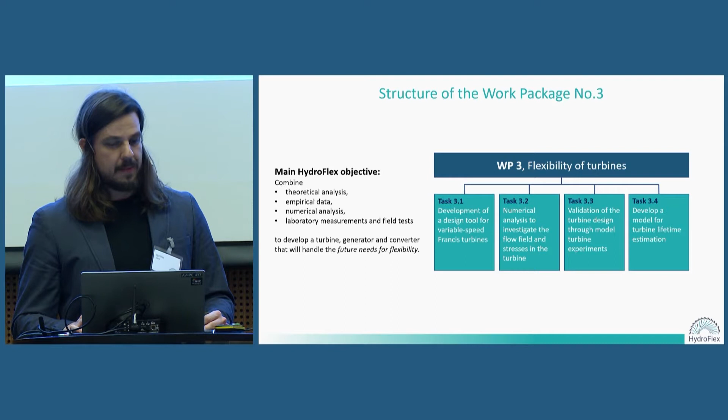So in this work package, which is named the flexibility of turbines, how do we address the main objective of HydroFlex? The main objective, as you can see on the left side, is to combine pretty much all research means, that's theoretical analysis, empirical, numerical analysis, laboratory measurements, in order to develop turbine, generator, and converter, as Ole Gunnar mentioned previously, that can handle the future needs of flexibility.

And in our work package, we work on the turbine in particular, and we have 4 tasks. The first task is to develop design tools that can help us do the research and build such turbines. The second was to combine the design tool with numerical analysis. The third task was to validate through experiments. And finally we had another task dealing with the lifetime estimation of the turbine.

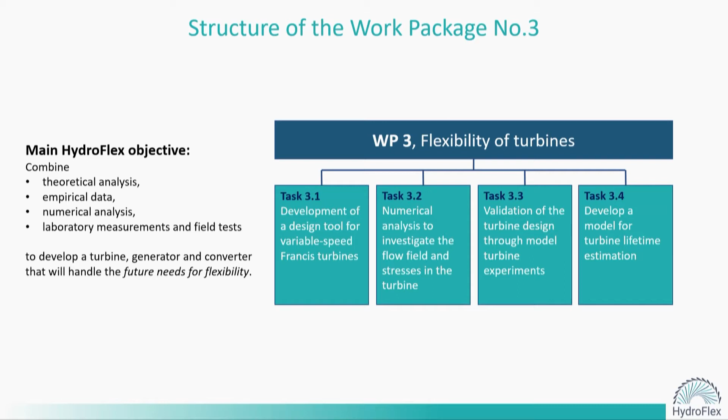We had 5 partners working in this work package, 3 universities and 2 industrial partners. NTNU was the leader of the work package, and we had LTU, Luleå University from Sweden, the St. Cyril and Methodius University from Skopje, and we had also Rainpower, the turbine producer from Norway, and EDR and Medeso, a software company dealing with development of numerical tools and software.

I was working at NTNU, but I recently moved on to Sintef, so that is why we see Sintef here as well. Sintef was also a partner in this project, and most activities were focused on different work packages. Not this one as well.

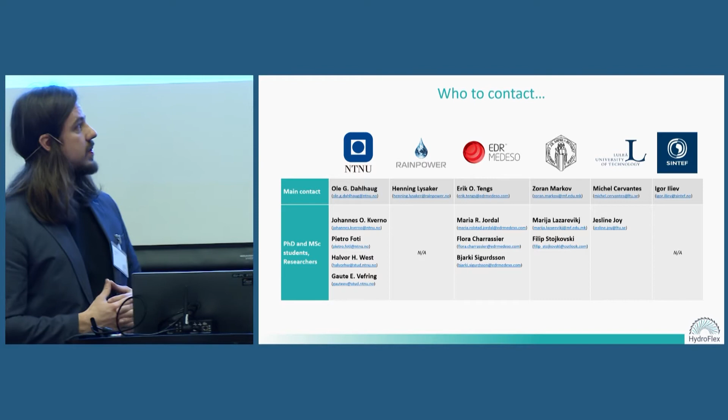So I'll try to summarize what was done in this work package, and as you can see, many people were involved. I list here the contact of these people, and for each slide you'll see the logos in the upper right corner. So if you have further questions later, feel free to contact any one of these people who may give you more details about what was done.

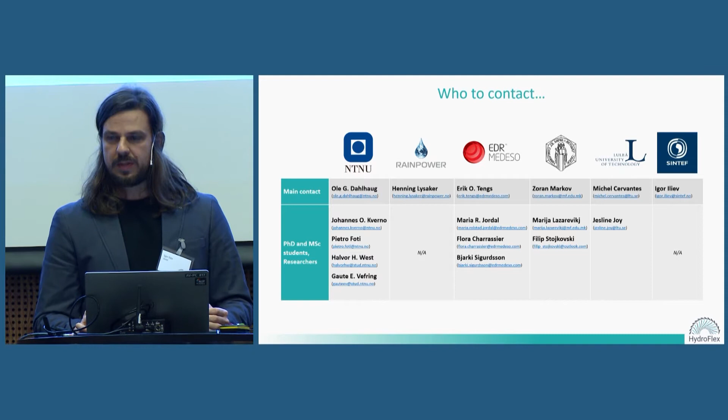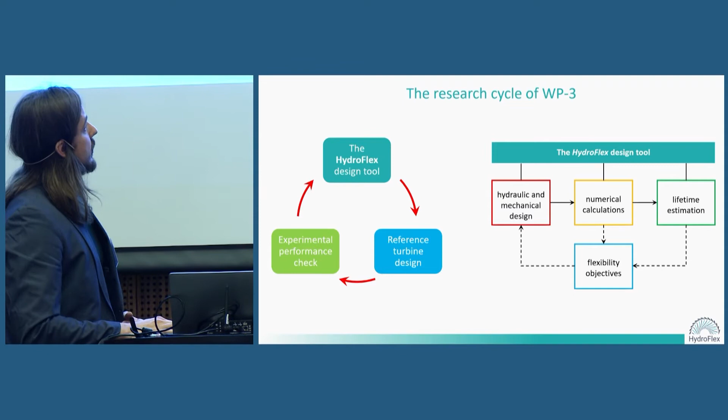And the HydroFlex design tool has sub-parts in it. We have a part that handles the hydraulic and mechanical design. We have a part that performs all the necessary numerical simulations. And all this can be shared to the lifetime estimation tool as well. And everything is returned back to check how our flexibility objectives are met.

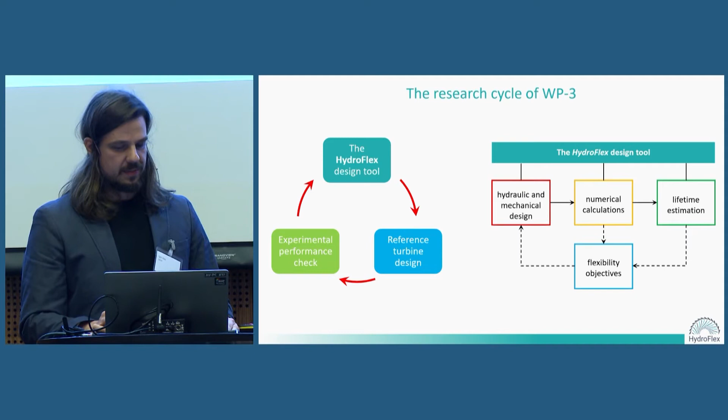Let's say that in this work package we define flexibility as increased or flattened out efficiency throughout the entire operating range, as much as possible, of course, and reduced stresses, both static and dynamic stresses. Of course, these objectives can be redefined for different design scenarios, and everything is fed back all the way to the beginning. So that is how the tool works.

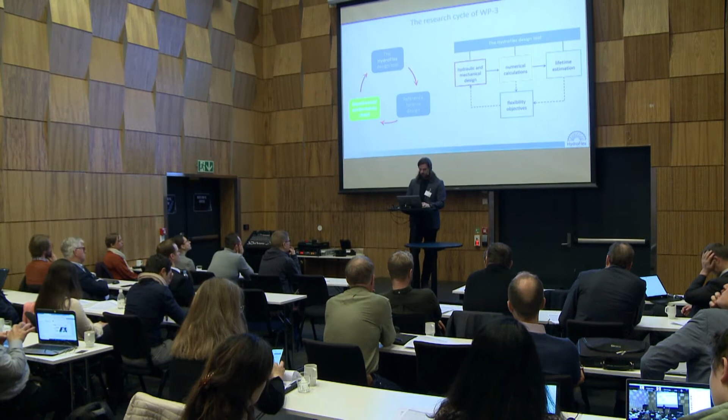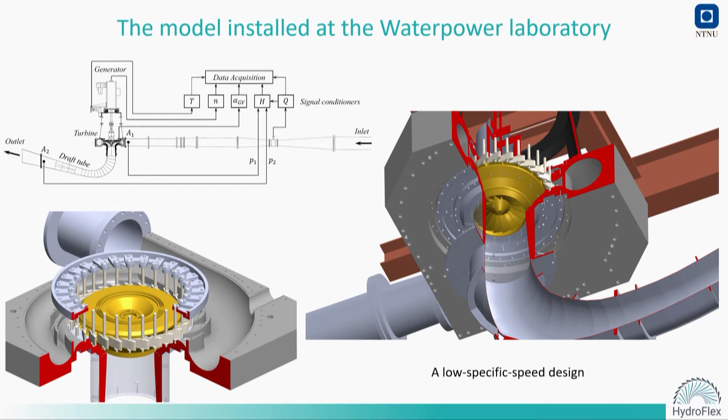Most of the experiments in our work package are done in this lab, except for the material tests, which I'll mention a little bit later, which were done in different NTNU and Sintef labs.

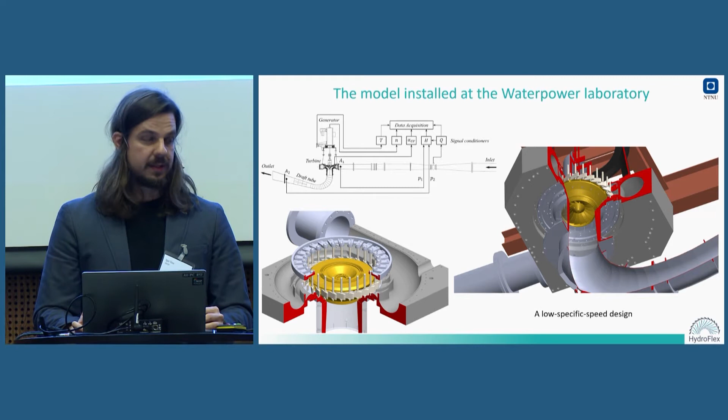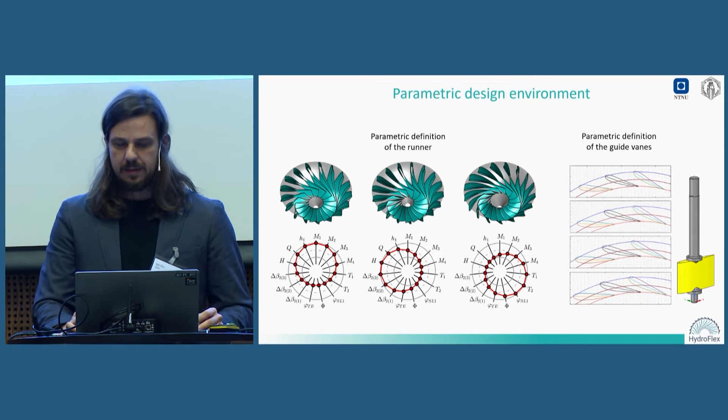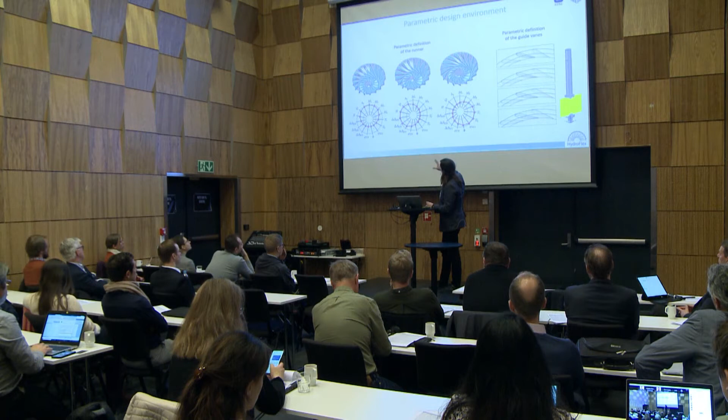Yes, so it's a turbine model, turbine rig that can achieve IEC standard quality. In the parametric design environment, we have spent some time to define the geometry of the runner parametrically. As you can see, it is defined on these diagrams. We see different combinations of the 15 parameters that were used to define the runner, and they have different values here, so you can see how each parameter is affecting the geometry.

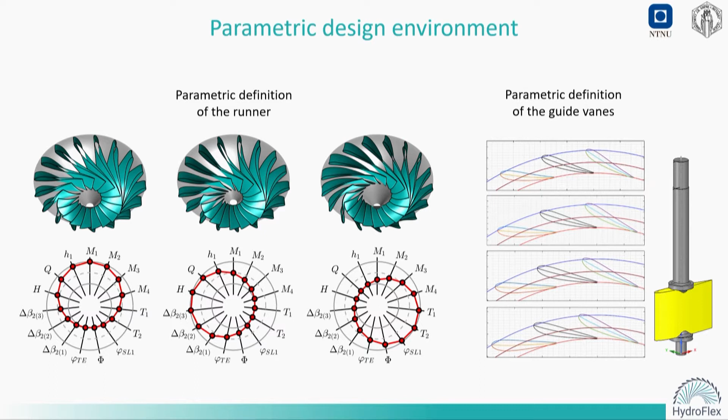On the other side, on the right side, we have the guide vane parameterized. We have just 4 randomly generated guide vane designs. You can see that, for instance, the thickness of the guide vane changes, the length of the guide vane changes, and other parameters as well, which were used in the design tool. Of course, I cannot speak more about the details here, but you can find all the information you need in the relevant publications.

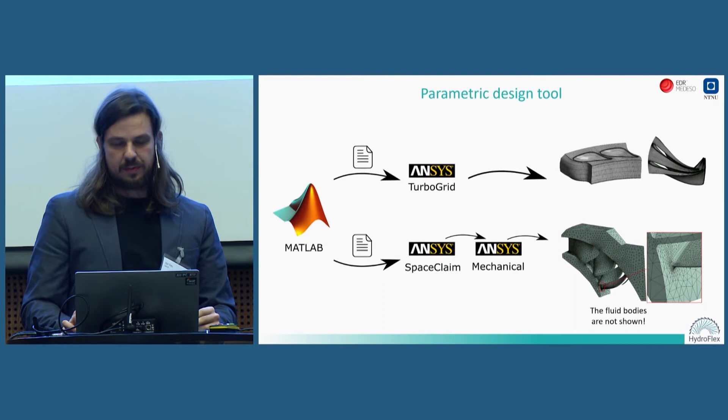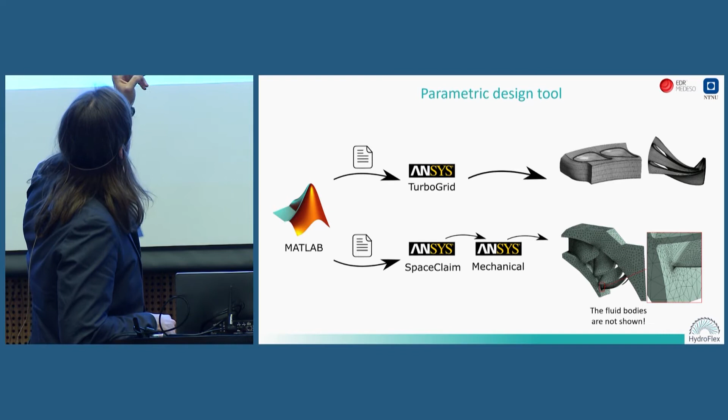So these were, by the way, MATLAB codes, and we used this scripting method to create output files that can go straight into our numerical simulation tool provided by the commercial software ANSYS. Once the files go in the ANSYS software, for instance, here in this tab we create the meshes. In the upper part, we use TurboGrid, and we import curve files to create the hydraulic domain, and then the mesh is exported. Here shown the guide vane and the runner.

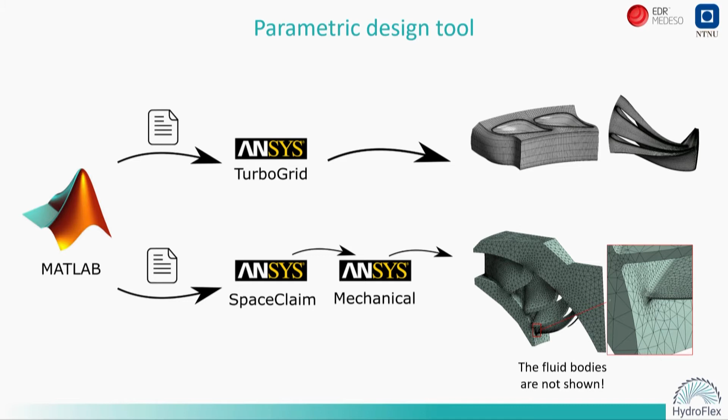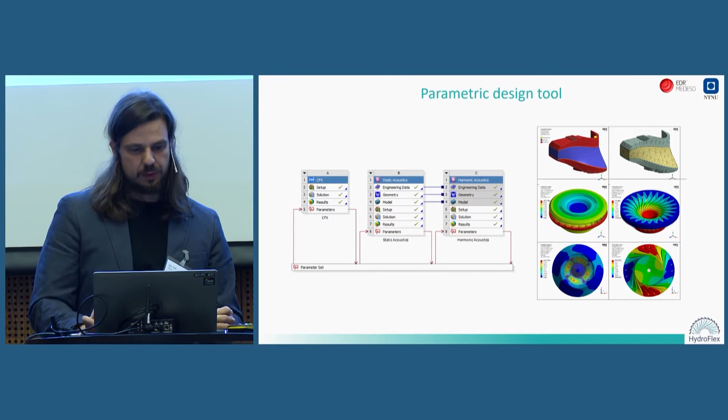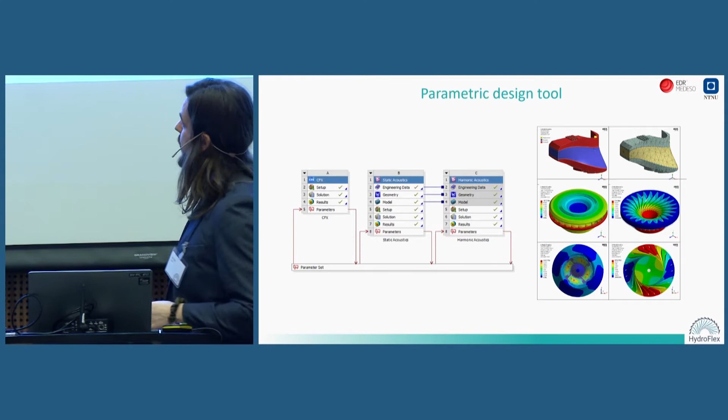On the lower part, we have some operations done in SpaceClaim to finish the geometry and identify a sector. And then finally the meshing. As you can see here, the fluid bodies are not shown, but they are also included. So the runner is simulated submerged in water. These meshes then go further on into the simulation part. This is a print screen presented directly from the Workbench project.

On the left side, the first part is the fluid simulations. These are actually transient simulations. And then we have 2 more, static acoustic and harmonic acoustic simulations. So the first one performs the transient simulation, then the oscillating fluid pressure, that's the important part, is loaded onto the structure, previously decomposed using Fourier series decomposition into the frequency domain. And finally, the structural analyses are performed in the frequency domain, harmonic analysis.

So what we can see there, the mesh that is shown is not the actual mesh that is used. That's just for demonstrational purposes and initial tests. But we have here the total deformation on the left and the imposed pressure field on the right, for 2 nodal diameters. So this is the transient.

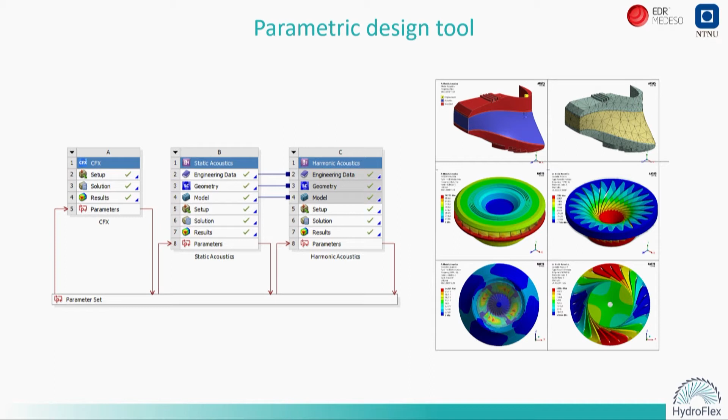So as I said, using these tools, we had to design reference geometries to conduct our laboratory measurements. For the geometry of the HydroFlex runner, at the time, the part of the tool dealing with automatic optimization from the structural side was not ready. So we used only the hydraulic optimization part to optimize the geometry. And then later we performed structural checks just to make sure that everything works well when we put it in the lab. So what I show here is just some CFD results.

The original turbine that we're using, the Francis 99, has its own runner, but we have designed a replacement geometry because we wanted a reference geometry that comes directly from our tool so that we can directly verify all the numerical methods. And as you can see, CFD results are quite interesting and pretty capable to capture the trend. We see that the turbine has the highest efficiency at one operating point, and then as it goes back and forth, the efficiency reduces. For that operating point, why is that? That is because the flow field is not well aligned inside the turbine passages, where we have additional losses. And that is the wetted surface of the HydroFlex runner.

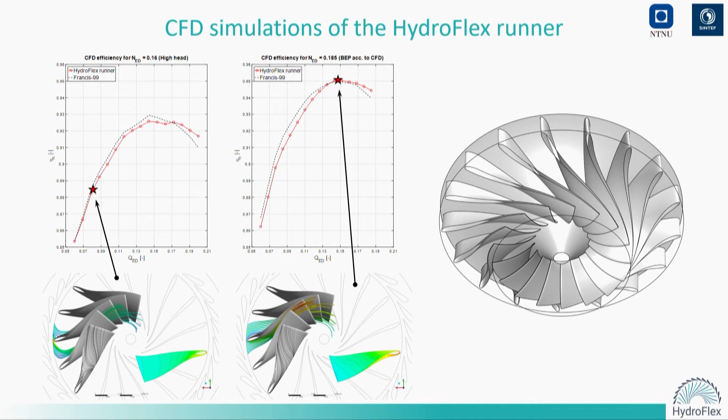As I said, we used structural simulations first to check the structural integrity, and then we used the maximum static principal stresses and strains to identify two locations on the trailing edge where we would like to do strain gauge measurements. Why is this important? Because when we operate the turbine at off-design operating conditions, it will be subjected to transient loads. And at the trailing edge, we have maximum stress locations. That's where typically we have cracks on the turbines, which is something that we want to avoid if we want to design flexible turbines.

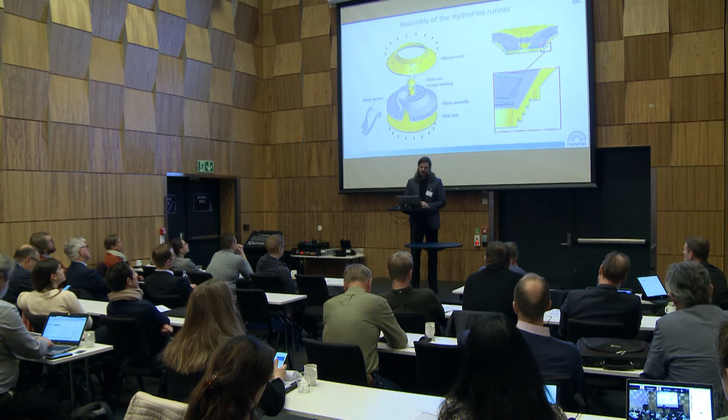And this is how we designed the structural or the mechanical assembly of the HydroFlex runner. We try to reuse the hub and shroud that were already available in the lab from previous research. And then what we did is we just redesigned the blade. So this assembly is a modular one, so if we later come up with an even better or different design, we can always test it just by replacing the blade sections.

Another important feature was that with this design, we know exactly where the connection is. And that's very important for when we do the structural simulation validation. So with this runner, we have solved some of the drawbacks of the original Francis 99 runner that were identified in previous projects.

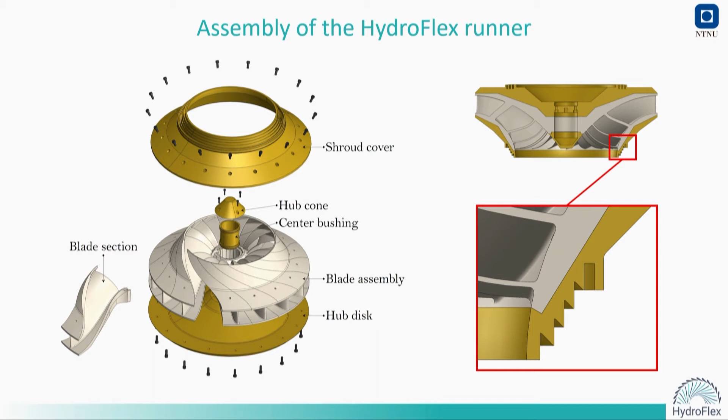And finally, we wanted to have the center bushing and the cone. That's the part where we will put onboard instrumentation. Because as you can see, this runner is rotating, and we want to perform measurements in the rotating frame of reference while it's rotating. So we need some equipment to be installed in the runner in a watertight place. Electronics, for instance, that should survive the operation of the runner.

So as I mentioned, in the central part, this is how, for instance, the amplifiers will be stacked inside. So we use 3D printed parts. We have a PhD student that is working on this to stack the local amplification. And on this diagram, you see, we plan to install strain gauges and pressure sensors. The signal will be fed into local amplification for improving the signal-to-noise ratio.

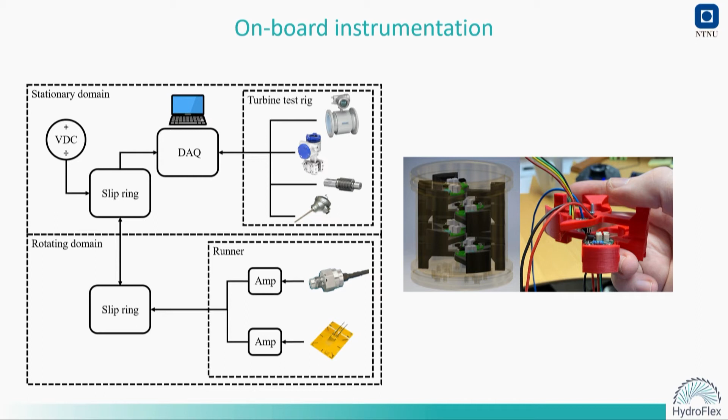Then that goes to slip rings, so that's the rotating domain, and in the stationary domain, it is transferred once again through the slip rings, and finally into the data acquisition module. Of course, together with the rest of the turbine performance, which is that part, the turbine test rig.

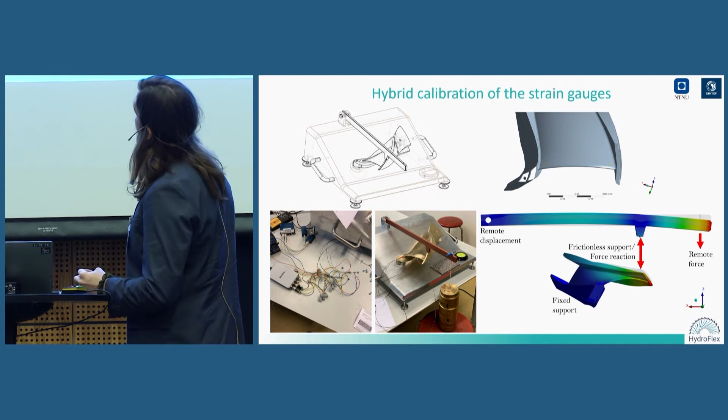For the strain gauges, because we finally want to know what the stresses are, but we can only sense the strains, which is the elongation of the material, relative movement, we came up with a hybrid calibration setup. So what we have here is, what should I call it? A fixture for the blade with a pivoted arm where we can install weights. You can see the strain gauges, they're connected to the amplifiers.

And then we can load the structure, see what voltages we get, and then we replicate the entire setup numerically and find out what the strains are in those locations. So that is how we intend to perform the calibration.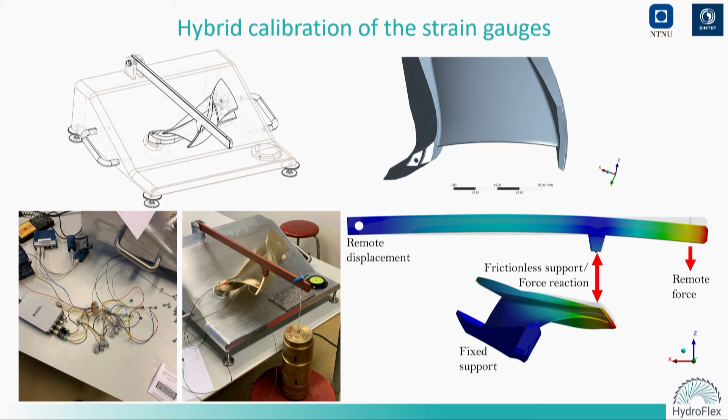By the way, there is no good way to calibrate strain gauges mounted on complex structures. If it's a simple beam, maybe we can use an analytical solution, but with this double curvature blade, it's very complex. So the only option was to rely on numerical simulations, very accurate numerical simulations.

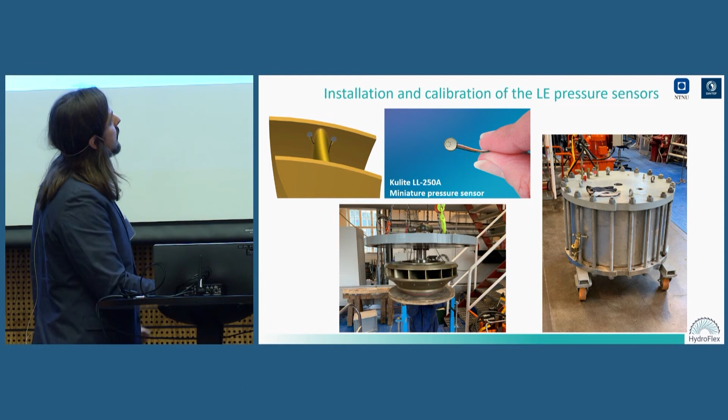We also, as I said, have installed pressure sensors at the leading edge, and this is how we plan to calibrate them. The entire runner will be submerged in that tank and pressurized. And then through that shaft, we have all the wires coming out and connected to a PC where we collect and record the signal.

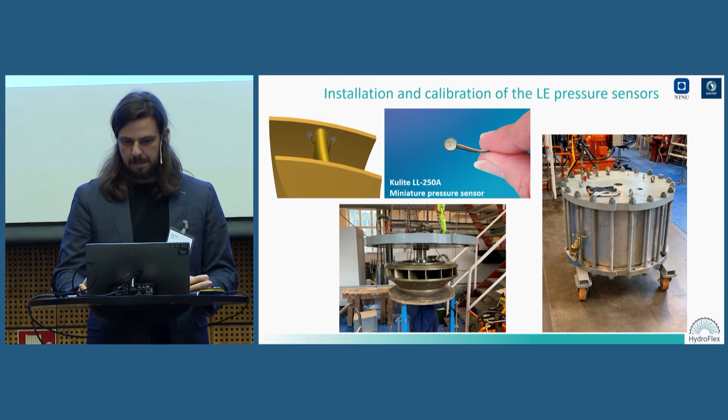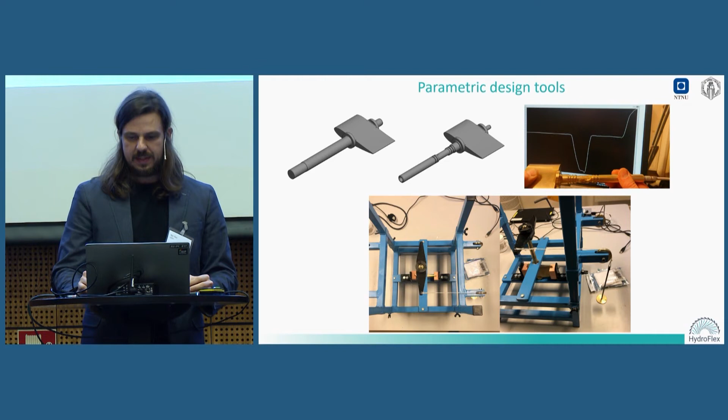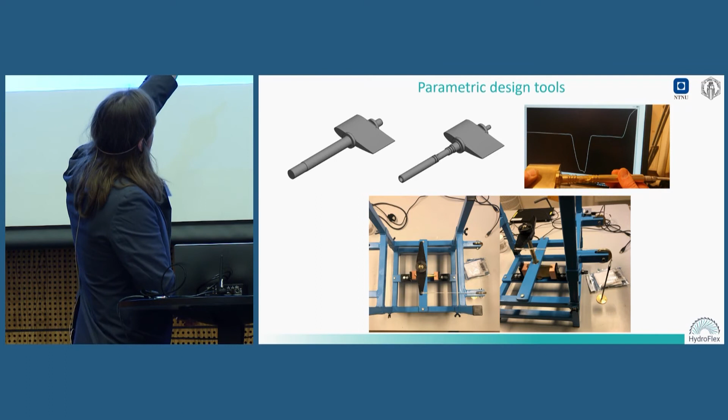For the guide vanes that were designed, the reference geometry of the guide vane, we have the standard torque measurement, and here I give some pictures of how that setup is supposed to look. So the blade is fixed in that jig, and then we apply torque. Here I only show one part, but actually on the other side we need to have another pulley, another weight, so that we apply only pure torque.

On the top part of the figure, on the left we have the regular guide vanes, which are used in efficiency measurements, but on the right we have a special type of shaft where we have mounted a strain gauge, which is calibrated here and is used to measure the torque during operation, the static and the fluctuating torque due to the RSI.

Those of you who will join us today in the lab tour will have the opportunity to see these devices demonstrated there.

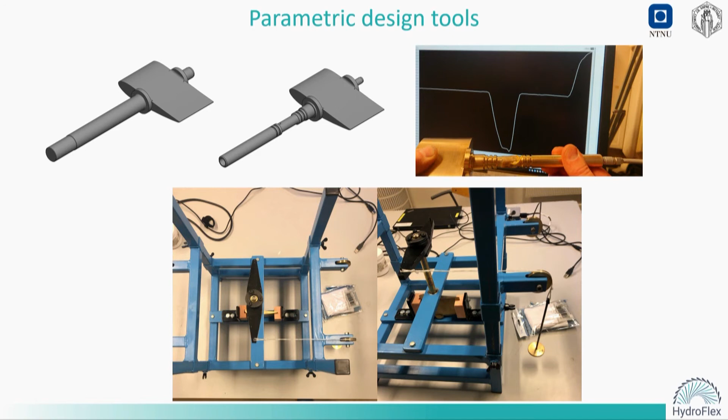We had another research part which was not parameterized at this stage, but it's a research that tried to control the residual swirl at the outlet of the turbine runner. So when the turbine is operating, especially at off-design operating conditions, the flow will have a residual swirl at the outlet of the runner in the draft tube cone. So this research was done in order to try and control that residual flow or reduce it. And by doing so, for instance, in part load, try to even mitigate the pressure pulsations as well.

By doing this, of course, the researchers have tried to increase the efficiency and reduce the pressure pulsations, which should translate in increased flexibility of the turbine. The results are very promising. The way those guide vanes are installed in the draft tube cone, they can move. So for several positions, measurements were done in the lab, and the performance was checked, and pressure pulsations as well. So they installed pressure sensors in this draft tube cone, and the pressure pulsation levels were recorded.

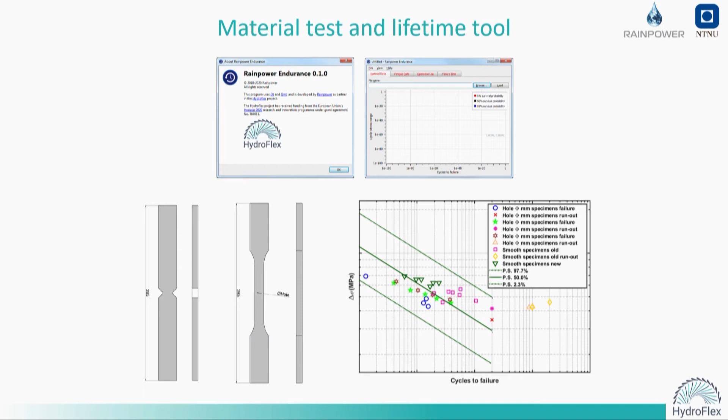Finally, all the data is collected and gathered in one tool. On top, we see some print screens of that tool, where statistical analyses are further being performed to identify what would be the remaining lifetime of a turbine. Of course, what's important as an input is the stress fluctuations for different operating conditions. So using stress fluctuations with, for instance, rainflow counting and Miner's rule, one can translate from an S-N curve to a partial lifetime of the turbine. This can use data from the numerics or from experiments for a particular runner.

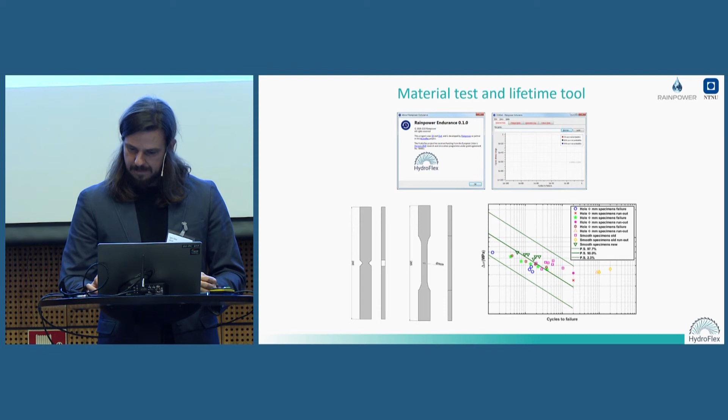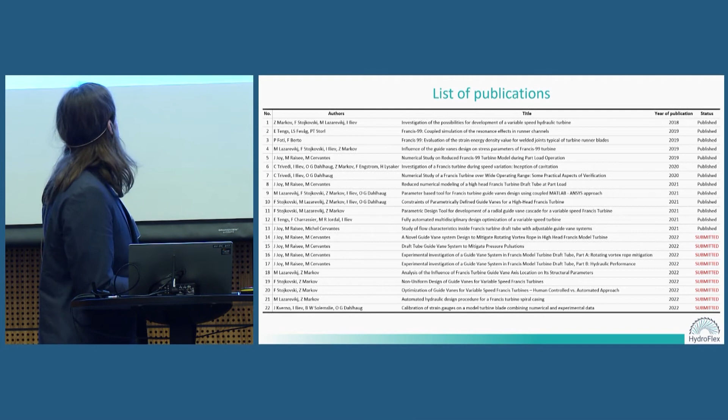As I said, most of the details are included in some of the publications that we have. Some of this is already published. We have several submitted, but more will come because as we collect more data, the writing part will kick in. So stay tuned, those of you who are interested in different parts.

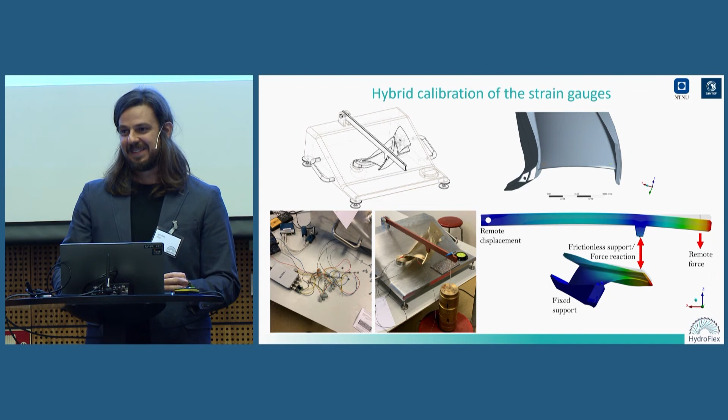Hi, Eric from Statkraft. I thought the draft tube vanes were interesting. How about at best efficiency point? Did they bother the flow at all? Were they invisible? That's the one question. And also, this is very much in the spirit of the Horizon 2020 sister project, AFC4Hydro. I don't really know, but did the projects help each other? Did you collaborate on tasks, or were there shared results that are of interest to both? That was number 2.

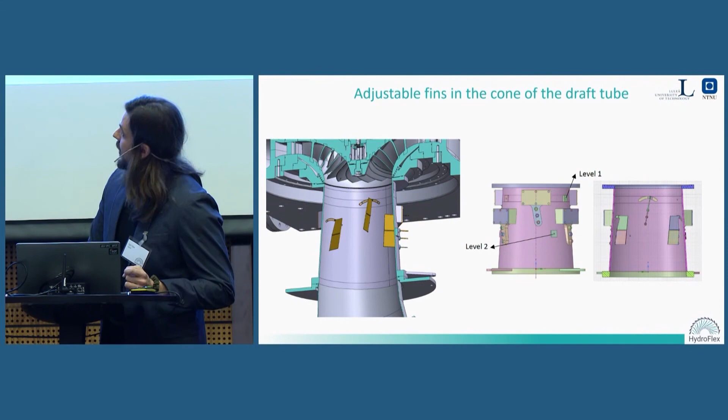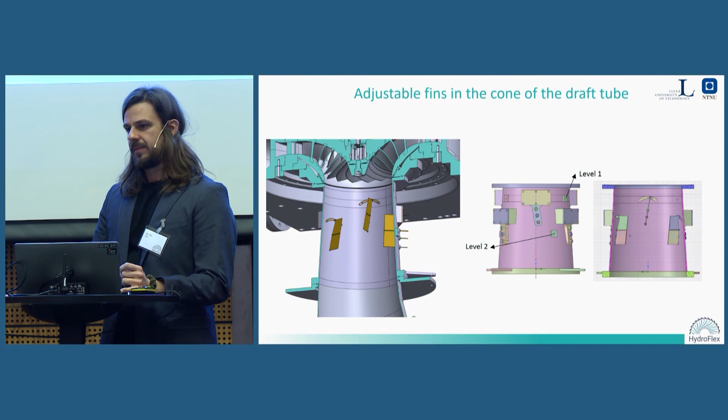Thank you very much. The first one, these movable fins or guide vanes in the draft tube cone were designed to have minimum impact at the best efficiency point. They were positioned to follow the flow stream in this operating condition, and they were envisioned to change in angle. For now, it's just the first part, but they can perhaps be designed to tilt the entire body of the fin. I don't think we saw significant impact at the best efficiency point from them.

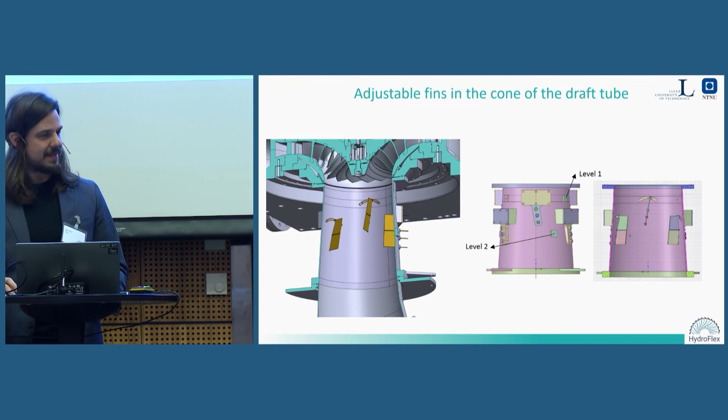And the second question, no, we did not collaborate in these tasks. LTU is partner in both projects, so yes, they have access to results from this project as well. I don't remember direct discussions or collaborations at that time, but of course they can communicate both projects and exchange data. Everything will be open, by the way. So not only that project, but any other project can start from there and build on it or use the data.

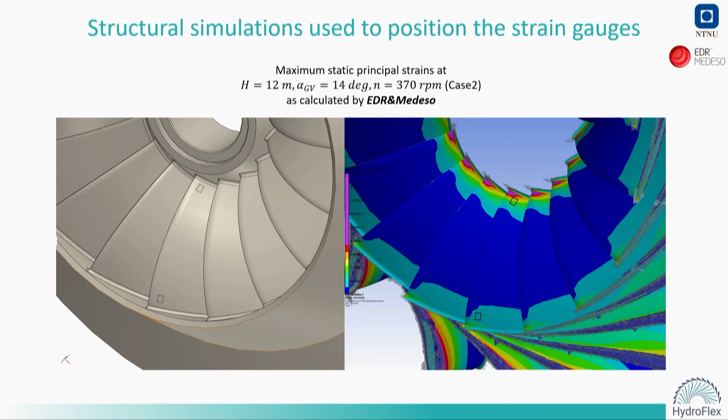I have one question. Can you go to the position of these strain gauges? At least at the hub there, you have placed them in an area where you have large gradients of the strain. Do you think that will give you an uncertainty? When you do it manually, you know that the position will be a little bit off, maybe. What's your comment on uncertainty for this?

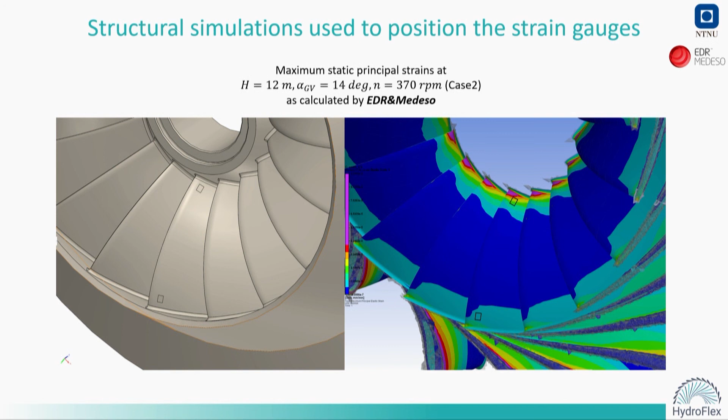Yes, they will be manually installed on the blade, and our lab technicians have tried their best to position them where we want them. And obviously, when they're placed in the gradient of the strain field, a small position change will introduce uncertainty. So we tried our best to install them where we want them and later measure where they're exactly installed and then reflect that in the numerical part.

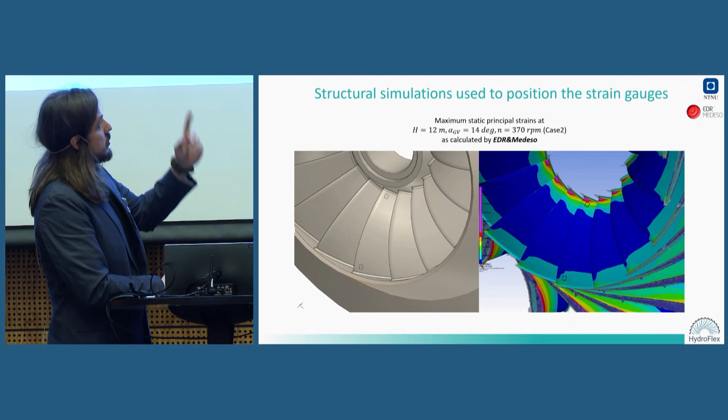Ideally, we would want to install the gauge where the maximum is, but that is where we have a curvature due to the fillets, and in that area we cannot mount them the way we want. So a compromise has been made to install them in another remote place and then use results to sense what is happening at the maximum. So some uncertainties, of course, with experimental methods must be accepted.

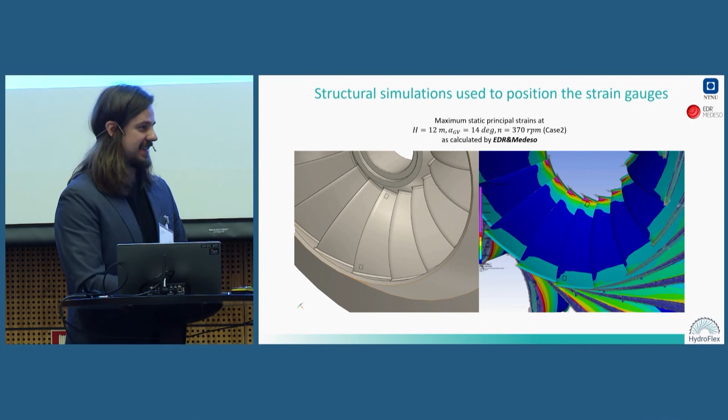Any other questions? Have you tested these strain gauges already, or are they planned to? The model test is not conducted yet. But the calibration and everything, all of that has been done. For how long do you think you will have data, and when will they destroy themselves? Well, we hope that they will not destroy themselves in our measurement campaign, but I think we will spend maybe 2 or 3 weeks conducting experiments, full days in the lab.